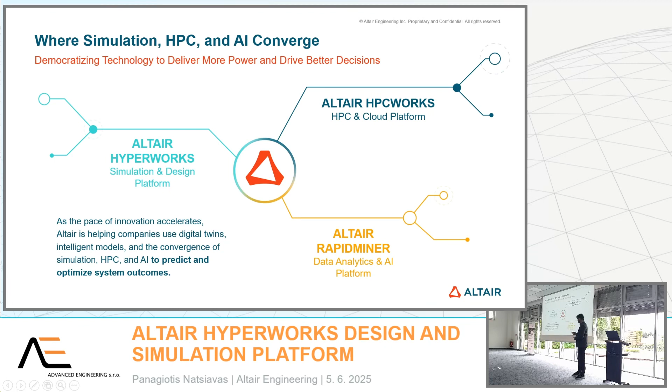So today's focus is going to be the first pillar, as I said. So I'm going to talk about the simulation part. And here I'm listing some of the benefits. Of course, since we're talking about simulation, with Altair HyperWorks, we're trying to reduce design iterations and physical prototypes. That means reducing cost of the company. Also, we're trying to empower large exploration of design solutions by having dedicated ribbons and workflows for optimization and design exploration. Also, we foster innovation with our tools, and most importantly, we help engineers and designers to talk the same language. So we help companies with many team members to overcome the different silos and to have all the people working together and having access to different tools that they can learn pretty easily and solve their challenge.

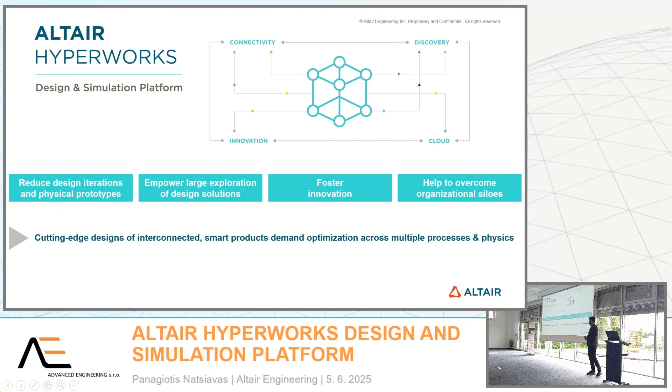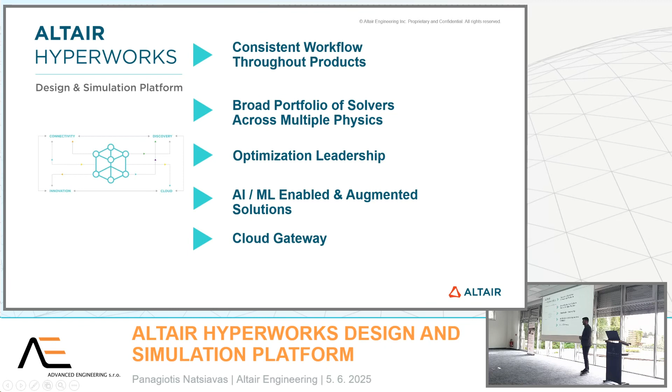So this is the agenda for today. I'm going to talk briefly about our modeling and visualization techniques in the beginning, and the consistent workflows that we have and connect with our broad portfolio of solvers across multi-physics solutions. Also, on top of that, how we leverage optimization to accelerate processes, and how we also, nowadays it's a trend, how we are pushing and enabling solutions and augmented solutions by using AI, artificial intelligence, and machine learning. And lastly, we're going to close with some news about our cloud and our Altair One solution.

So Altair, if you may know, offers a big variety of tools from concept design to validation, exploring multi-physics analysis. So one can use different tools to build her model. So we have Altair SimSolid.

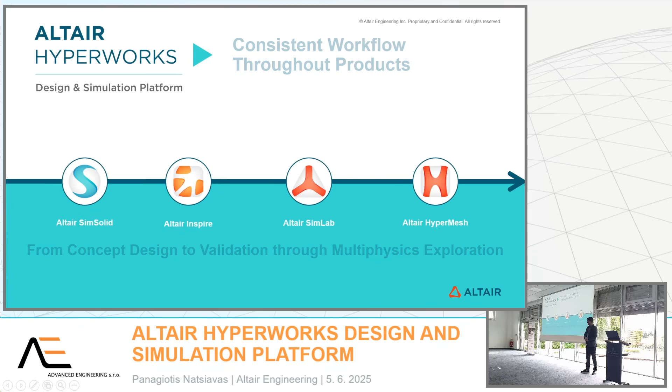So we have Altair SimSolid, our revolutionary meshless solver. We have Altair Inspire, which we call a simulation-driven design platform because the simulation in early stages of design really drives the design of the product. Then we have Altair SimLab, which is used for multi-physics analysis.

And lastly, our flagship product for detailed modeling and validation, Altair HyperMesh. Here I'm going to also spend some time introducing the new GUI, the new product called Altair HyperWorks. So as I said, based on the design time and the profile of the person, we have the right tool for you.

For designers, when you are in the early stages of design, we have Altair SimSolid and Altair Inspire that you can use in the very early stages of design. It specifically targets not so much experts in finite element analysis, but designers who are just starting the first steps with simulation. So it's an easy GUI, easy to learn, easy to use.

Then, for part-time analysts and for people with more knowledge, we have Altair SimLab, and here we also leverage a multi-physics approach, so you can really solve a thermal problem coupled with CFD or with structural analysis. It's very easy to use and easy to couple this analysis. And lastly, for detailed modeling, complex designs, big assemblies, and for finite element experts, we have Altair HyperMesh.

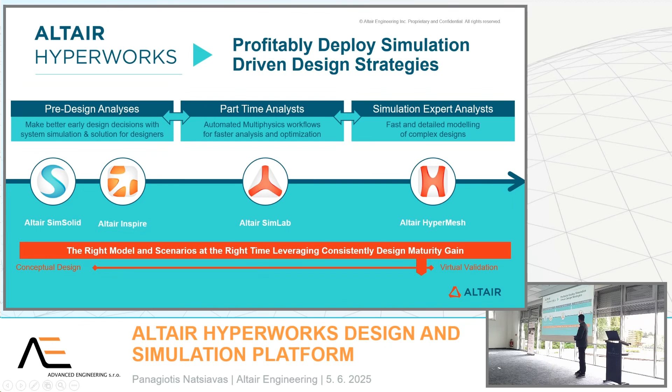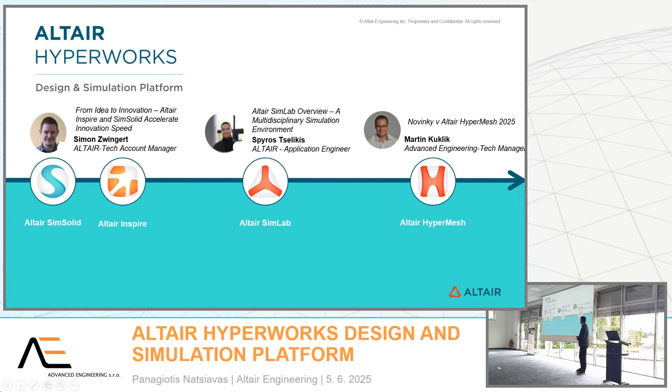And the agenda for today looks, it's built accordingly. So we have different people talking about our different products. We have Simon, who's going to talk about Altair SimSolid and Altair Inspire. Then we have Spyros Tselikis from Altair, from the same office. Spiros will talk about SimLab and some use cases engaging with multi-physics analysis. And also we have Martin, our colleague from Advanced Engineering, who is going to cover the new features in HyperMesh 2025.

So let me also share a few things about our vision for the future and how we're trying to shape our products. Our vision is to have a unified user experience across all different products. So we're trying to blur the lines between the different products, giving the opportunity for someone using Altair SimLab for multi-physics analysis to take it and mesh it maybe in HyperMesh and leverage the extreme capabilities of HyperMesh in meshing.

Or take it and do some rendering analysis in Inspire Studio. So some of our products already look alike, they have the same GUI, let's say. But we're trying more and more for the products to have the same GUI. So our solution is really not to sell our products to you, to our customers, to our users, but really sell our solutions to your challenges.

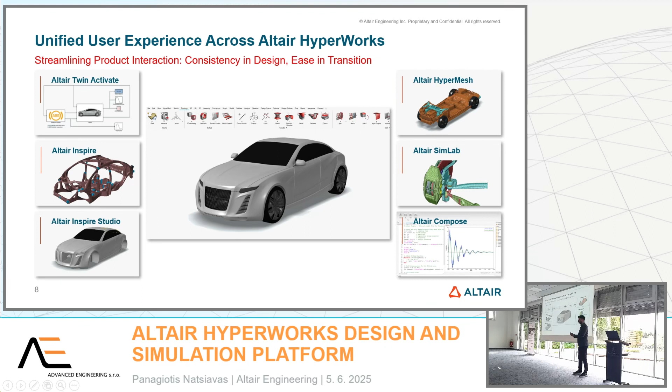So we're not going to name products and stuff, but we're going to name solutions to you, because the only thing you care about is how to solve the everyday problem. So this is the vision and where we're trying to go: one product, easy to use, easy to ramp up.

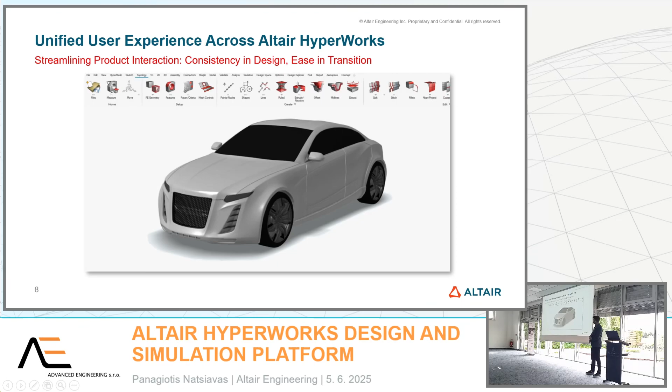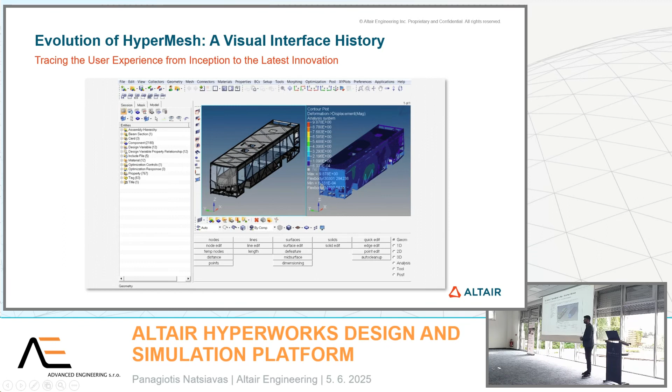So let me focus now on HyperMesh. HyperMesh has been Altair's flagship product for more than 35 years. The development team worked tirelessly all these years to put in nice features and workflows that are well ahead of industry standards. Here you can see different looks of HyperMesh, how it was in the beginning. If you know the early photos, maybe be careful, it's going to show your age.

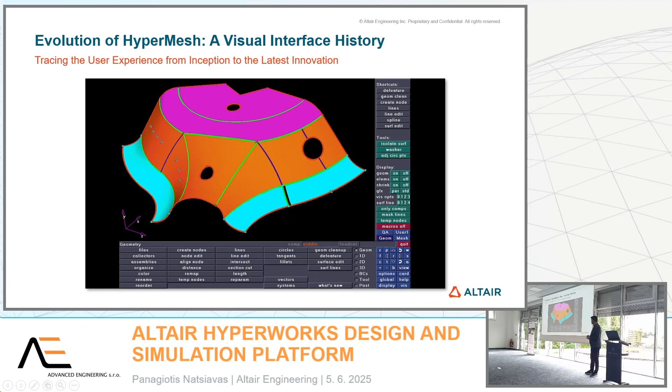So this is how we started and how we ended. So now is the time that we leave this classic, let's say, HyperMesh in the past, and we're moving to the new interface. From 2022, we only have the new HyperMesh, and we believe that with the new HyperMesh, we bring tons of new development and new experiences for our users. Of course, we're trying to make this transition, this migration, as seamless as we can. All the models you had before, all the scripts you may have, the processes, they remain unchanged, and we are here for you to help you.

We have tons of material online, tons of trainings. You can also ask for training on your dedicated specific needs. So you are not alone in this migration process. We are here to help you.

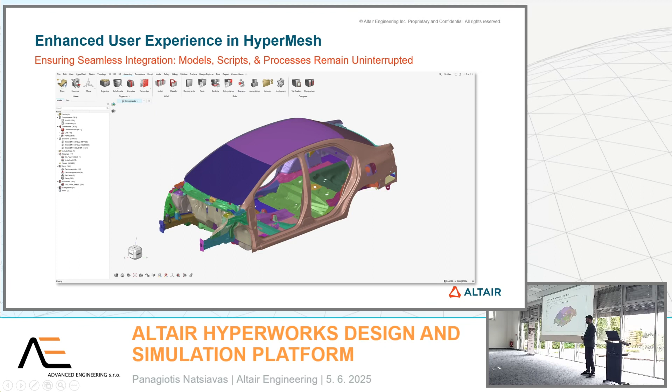So some of the new workflows, we believe that we have streamlined all the new tools with the new interface. The big change from classic HyperMesh is that now all the panels are gone, and now we have ribbons. The ribbons are in the logic of the CAE analysis, how it starts from geometry cleanup, then how you move with the meshing, how you apply the boundary conditions and loads, how you send to the solver, and also we have some post-processing capabilities in it. So it follows the logic of the sequence of the CAE chain.

Of course, we have drop-down menus that you can see.

If you select a tool, we have another menu below. We also have help documents that explain what this functionality is doing, and some shortcuts that you have. Of course, you have better view controls with the cube that lets you rotate your model and have different views. And if you don't know something, you can click Ctrl+F and write it.

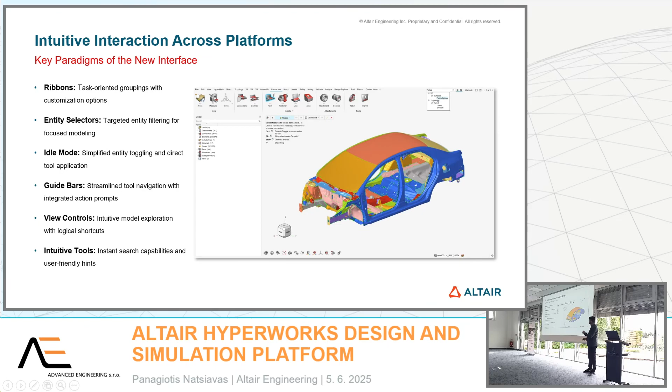So I'm going to use the auto-mesh functionality. You can really find it there and it will populate the corresponding ribbon and tool.

So why are we doing this? Why are we changing from classic to the new GUI? What's the motivation behind this change? As I said, performance and the number of clicks is mission critical for us. It's very important to give you enhanced tools.

But it's not only that. We believe that with the new HyperMesh, we have tons of new enhancements and new workflows. I have a slide that summarizes most of them, and I believe Martin will also share some news. Also, some tools have integrated artificial intelligence in them, so I will explain and show you the shape AI technique that we have, and also the physics AI that is already embedded in HyperMesh, so you can really use it already.

We also made it a seamless learning experience for new and veteran users. It doesn't matter if you are new to HyperMesh or used to the classic one. The trainings we have let you get up to speed with a couple of hours of training for 3-4 days, and then you can be independent. As I said, we're trying to have this unified GUI, to complete a congruent user experience and have the look of all the products be the same.

And also, we're moving towards this because we see that most of our customers are dealing with multi-physics analysis. We are moving on this road towards cloud, towards collaborative work and multidisciplinary solutions.

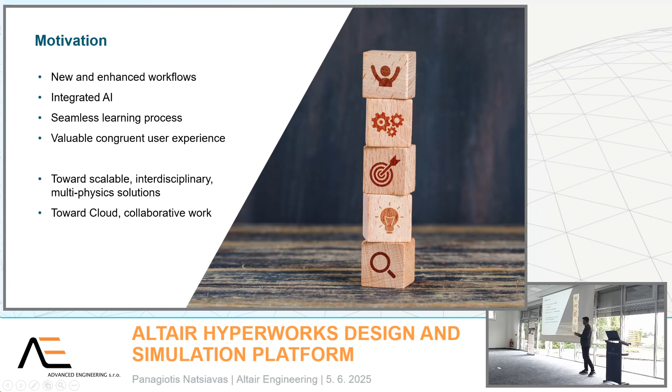So for all clients, we have the view cube I mentioned, which makes it very easy to handle the model, and the tool belt. We also have the dark theme. This is a very wanted feature. Now you can use HyperMesh and have a dark theme in the background.

For HyperMesh, I'm not going to go through all of them, just to name a few. We have a new workflow design explorer since a couple of years now. It's not pretty new, it's from 2021 I think. For design exploration, I have some slides later on that I'm going to show you.

We're also trying to connect the post-processing world with the pre-processing, so we brought HM Post into HyperMesh, so you can really see some results while you are pre-processing by leveraging the HM Post ribbon. And for HyperView, we have an upfront loader, so you can load the results upfront in order not to wait ages to load the model.

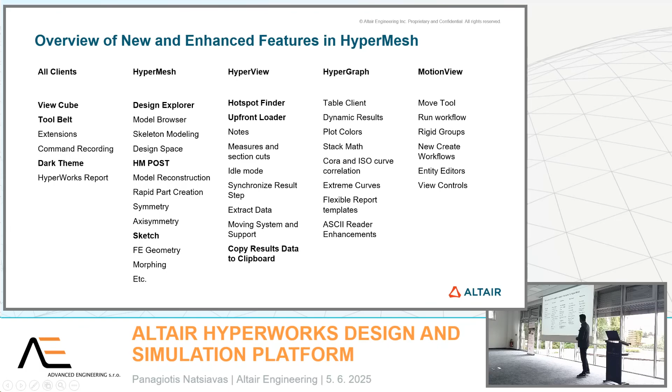The hotspot finder is a pretty nice feature that lets you spot all the red areas pretty quickly. There are also some new features for HyperGraph and MotionView, which I'm not going to go through all of.

Now moving on to our solvers: all the previous tools I mentioned, SimSolid, Inspire, SimLab, HyperMesh, are seamlessly linked with all these solvers. And as you see, we cover and simulate different areas.

We have solutions in control systems, and we offer solutions in the manufacturing world with Inspire Cast, Inspire Mold, Inspire Extrude, and all these Inspire platform solutions. We also have solutions in the world of vibrations, acoustics, explicit analysis with RADIOSS or with OptiStruct, which I'm going to show, for crash analysis, blast, heat transfer phenomena, CFD, fluid dynamics, and also some electromagnetics applications and electronics. So you see a variety of different solvers here that are seamlessly linked with our modeling and visualization tools.

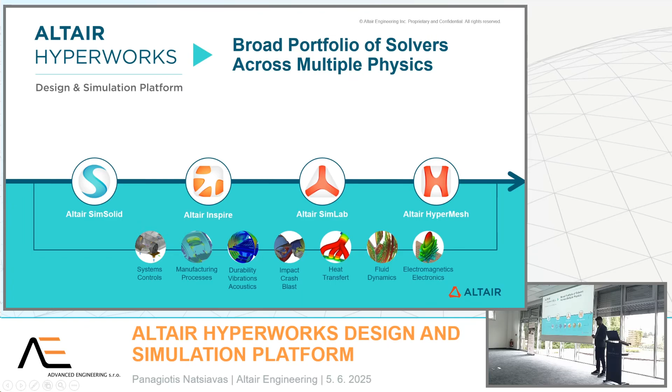Given my background—since I'm a mechanical engineer, I forgot to mention that in the beginning—and I'm more focused on structural analysis, here I have focused a little bit on our structural solvers: Altair SimSolid, OptiStruct, and RADIOSS. So I'm going to show some features and a brief overview of each of these tools.

So I'm going to begin with what we believe is going to be a breakthrough: a revolutionary SimSolid, which doesn't have mesh. You don't need to—you just import CAD, no geometry simplifications, you don't need to spend hours on meshing. It uses pretty much the same theory as the other solvers: it's an external approximations finite element method.

And you can have results really quickly, no matter how complex your design is, results in minutes. So I recommend, if you haven't tested it, it's really an eye-opener. Of course it gives you accurate results, but the nice thing about SimSolid is you can learn it in a couple of hours. It's a very easy GUI, easy to use, easy to learn.

The development team has worked tirelessly. Since we acquired this tool in 2018, we have 20 plus major releases, so we're moving fast and putting many functionalities into it. We have two flavors of SimSolid.

We have the SimSolid app, standalone, that you can download and use, and we also have SimSolid on the cloud, a web browser application. And just to name the last development we did, we integrated an eCAD, electronic CAD reader, in SimSolid. This opens the road for not only structural analysis, but also some electromagnetic and electronics simulation.

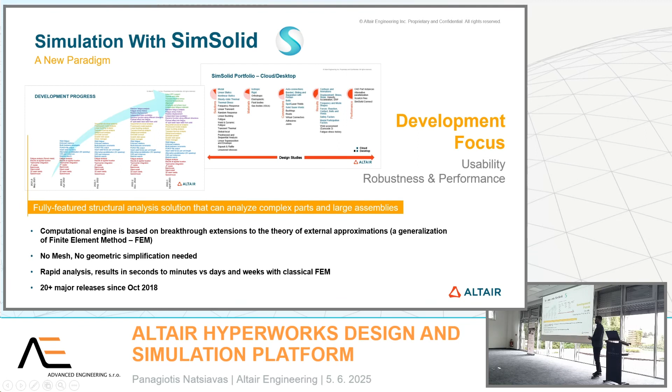Moving on to the second structural solver, Altair OptiStruct. OptiStruct is our industry-proven software solver for linear and nonlinear analysis under static and dynamic loading.

If you compare it with open source Nastran, the linear solution is pretty much similar, it's an enhanced version of linear analysis in Nastran. But since 1992 when we started with OptiStruct, the development team transformed it into a fully featured solver. Now we can solve nonlinear phenomena, heat transfer, fatigue, vibrations, and lately we also integrated some explicit code, so we can solve phenomena using explicit timescale, like impact and drop tests.

The benefit of OptiStruct is that you can have one model and one solver for different analyses. You can solve the same part from the perspective of fatigue, heat transfer analysis, or nonlinear phenomena, so you can have different simulations.

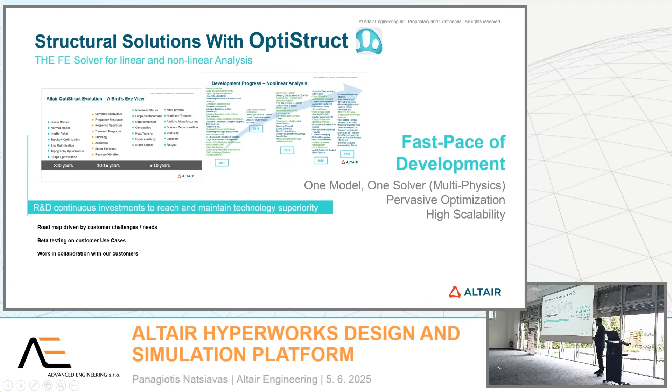It also has embedded optimization, so you don't need to open another tool or product, you can leverage optimization within OptiStruct. And some parts of the code are parallelized, so it's highly scalable and you can run it on multiple cores. But let me focus on the latest development, the explicit analysis.

It's been 2 years now that we've developed a new explicit solution in OptiStruct. It's not the same as Radioss, it's a totally new workflow that has all the standard analysis capabilities.

And most importantly, we recently introduced a single input file with implicit and explicit subcases in it. So you can start with implicit analysis, and when the time step becomes really small, you can switch to explicit analysis. This implicit-explicit continuation subcase is all in one input file, and again, part of the code is parallelized so you can gain speed.

And here on the right, you can see different applications like a drop test that we solved with OptiStruct, or an impact calculation.

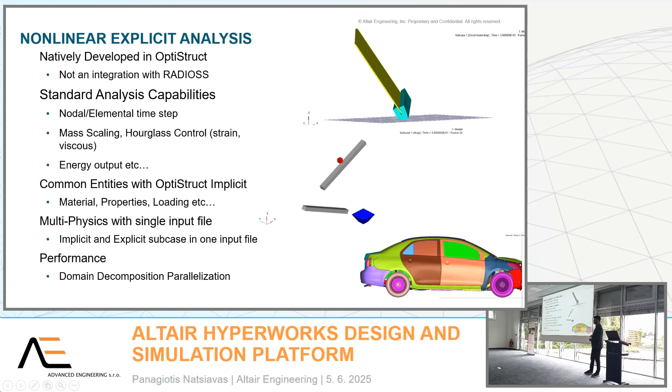Regarding Radioss, you may have heard that we also introduced an open source version called Open Radioss. It's now been 3 years that we've opened it up for the whole community. Here are the reasons why we did it: to democratize the use of explicit dynamics analysis, to maximize synergies between different institutions, universities and industry, and to facilitate knowledge exchange and ideas.

Everyone can go and download Radioss, Open Radioss, it's free. We only have one restriction, though it's not really a restriction: when someone develops the code further, they have to put that development back for the favor of the whole community. So if you make something new, we encourage users to contribute it back, which really helps move forward the explicit analysis solution.

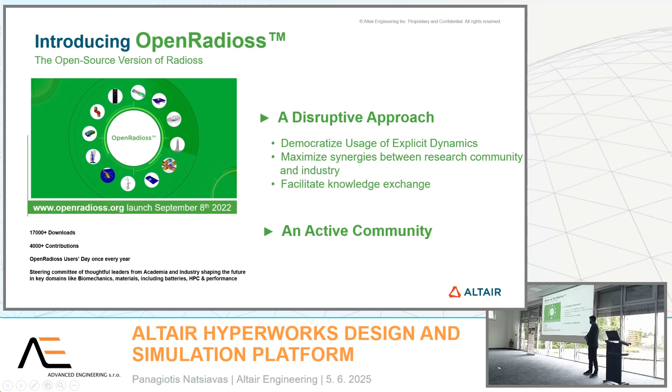Besides the open part, which I call Open Radioss, we also keep Altair Radioss, a commercial version that comes with the Altair license model. You get the same technical support, can ask questions, and it has extensive QA. It's available under Altair units, and it has some additional capabilities like encrypted models for dummies and barriers, and some other material laws and such.

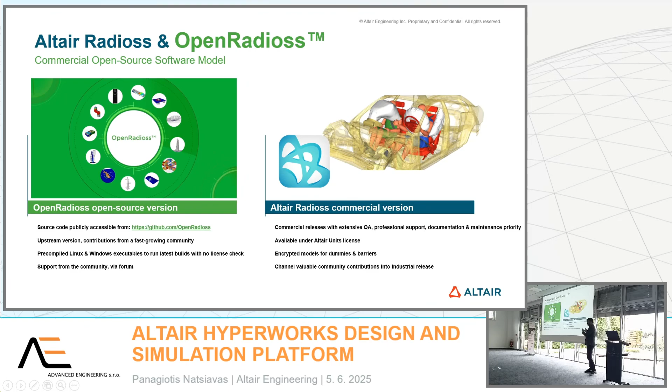So we have Open Radioss, which everyone can download, it's open source. And we also have Altair Radioss, under Altair license. Now that I've given you these three solutions, let me put some perspective on when to choose which tool based on the engineering challenge and the physics you're trying to solve.

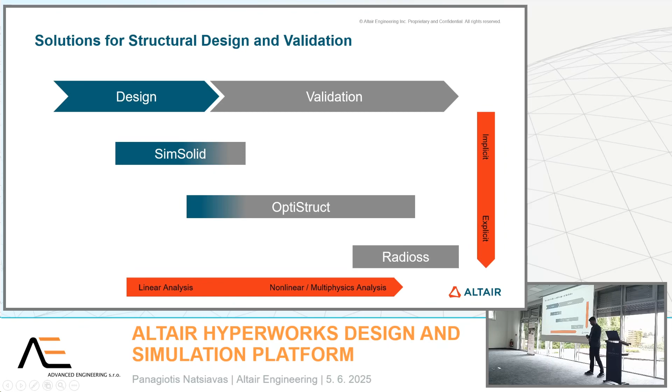Let me move now to optimization. Regarding optimization, really we can brag that we are the experts here. We have had optimization techniques since 1990, so we have been introducing topology optimization for 35 years now. And this optimization does not only affect structural analysis, but also applies to all these different solutions, so I've chosen some use cases not only on structural, but on CFD and thermal analysis that you can see.

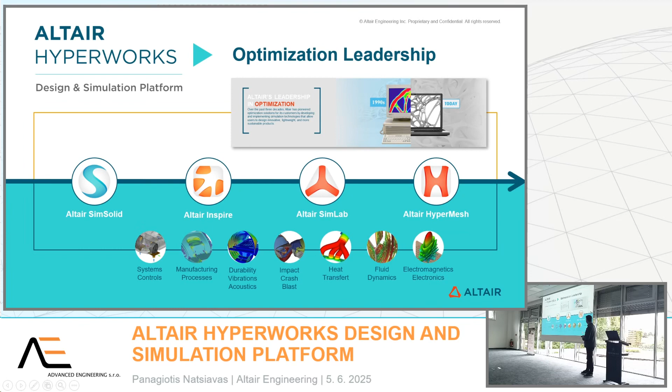So our techniques are apparent within these two products, OptiStruct and HyperStudy. I've already talked about OptiStruct, which has optimization embedded in it, but we also have another tool called HyperStudy, which I'm going to talk about in a minute. OptiStruct has had optimization techniques for 30, 35 years now.

We have two main pillars of optimization, let's say: the conceptual optimization. This really starts in the early stages of design, when you have some ideas on how the part will look like, and here we have two different optimization techniques. Topology is about where to place the material, and you can get rid of areas where you don't need material - this is called topology optimization. And then we also have topography optimization.

This finds the best pattern. For example, if you have beads, especially in the doors of a car or on the hood, this is just to have the best beads pattern in order to reduce maybe the noise - you don't want to hear the engine.

So this is called topography optimization. And then, as you go further into the design, for better fine-tuning let's say, we have parametric and shape optimization. This is the second pillar, and here we have shape optimization. We can change a little bit the shape and also the size, for example the thickness of each component. So different optimization techniques based on different applications that you are trying to solve.

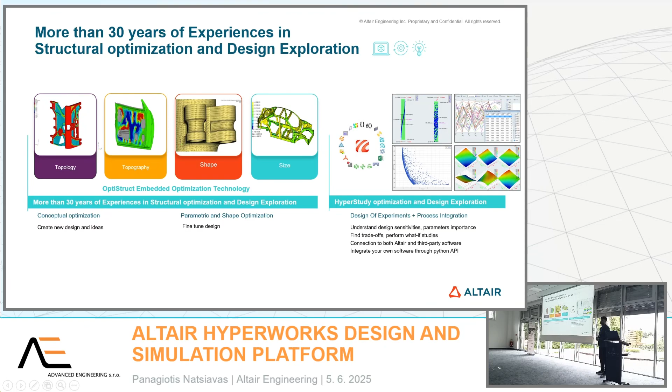And also the nice thing about HyperStudy is that it doesn't work only with Altair solver results. So of course you can load results from Radioss, from OptiStruct and SimSolid, but you can also load results from third-party software - so you can load results from different solvers like Abaqus, ANSYS, and so on. Or you can even have your own code with Python - we have a very nice Python API that you can leverage to build your own optimization workflow.

Being on the topic of optimization and design exploration, let me move a little bit and say things about our Design Explorer workflow. Design Explorer is a ribbon-dedicated workflow in Inspire - we had it in Inspire, now we have it also in HyperMesh. What it really is, is an end-to-end workflow for quick optimization and results processing, with an easy GUI.

You can identify your design variables, you can have an exploration summary to see the different designs, and you can understand the effect of these designs on the part. And what's the nicest - the one that I find a highlight of this - is the nice trade-offs that we have.

These nice sliders that you can change on the fly - for example, if you define the thickness of the part as a design variable, you can make the part thicker or thinner, you can move it left and right, and the part on the fly approximates, using AI and machine learning algorithms, the new stress or the new strain. So this is a very powerful technique that we have, the sliders.

And lastly, it's also really good in terms of how you interpret the results. It does result categorization, and you can have some scatter plots and stuff like that.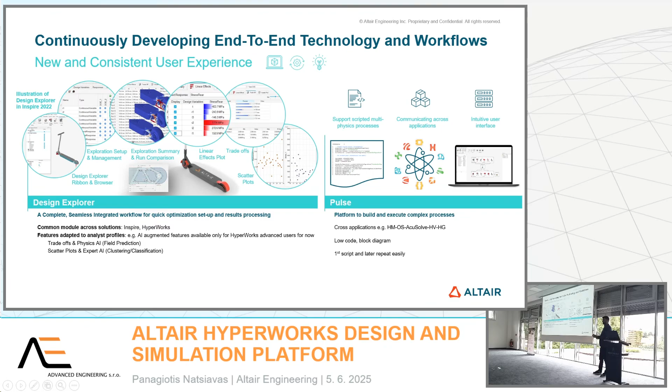So Pulse is really connecting the different products together, and it has this nice workflow from pre-processing, solving, analysis, and post-processing of the results.

Now some optimization use cases that I have, here I try to have different examples. So here I used for thermal and fluids, on the left, firstly, OptiStruct with AcuSolve, again an FSI topology optimization technique. It's about heating pipes and finding the best geometry of the pipes in order to have the least amount of thermal expansion. So this is an analysis that uses topology optimization for CFD and structural analysis.

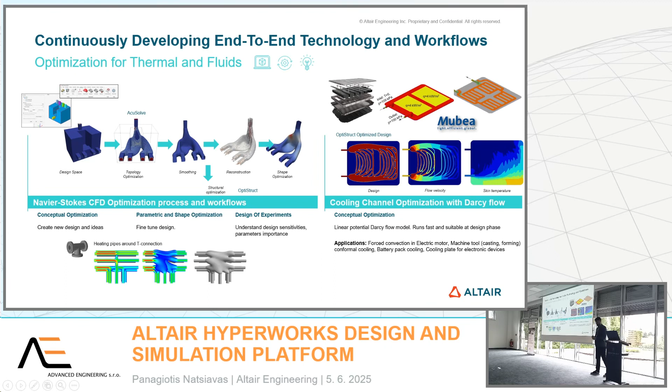Another application is a project we're doing with Mubea. Everyone is going to benefit from that - batteries, laptops, everything has a battery, and how we cool it off so that when we use it we don't get a very high temperature. We're putting a cooling plate and leveraging optimization with Darcy flow in order to have a better flow of temperature and not heat up the device. So this is, again, a use case we're doing for heat transfer analysis with structural optimization.

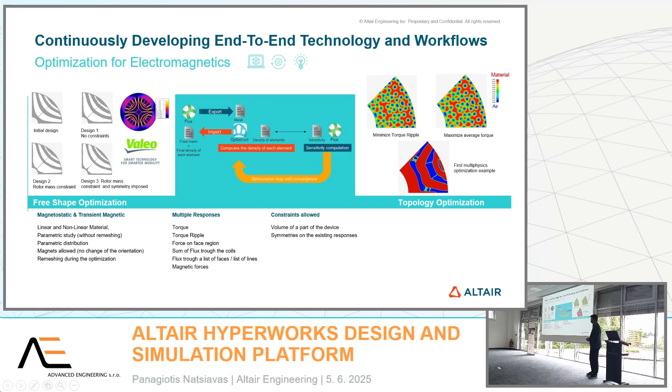And lastly, another use case this time is in electromagnetics, e-motor. We have an electric motor, and we're trying to find the optimum shape. Here we're performing a free shape optimization using our Altair Flux, our product for doing low frequency electromagnetics, and how it connects with OptiStruct. We're trying to maximize the average torque of the machine and also minimize the ripple of the torque. So we're trying to find the best shape of the rotor magnets to do that, and this is a project we're working on with Valeo, another OEM for automotive.

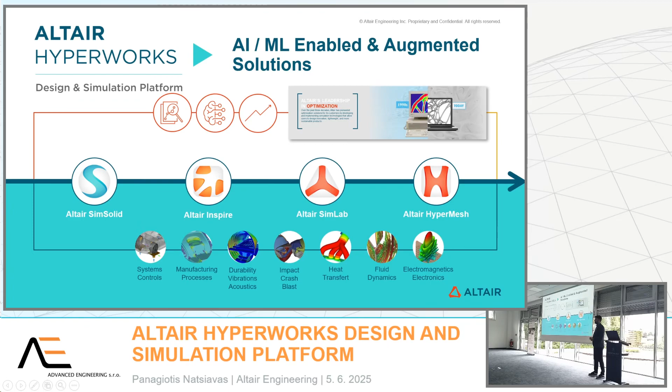Now, also, on top of optimization, I have to say we're also trying to leverage artificial intelligence and machine learning when it's of better use. So some of our workflows have AI integrated in them.

So why should we use AI? What's the added value with Altair AI? First of all, what we're doing with Altair AI is trying to augment the already variety of tools that you have, augmenting the toolkit of the engineer.

We're trying to increase productivity by getting rid of repetitive processes, when you're doing the same thing again and again. We leave that for the AI, and try to focus the human more on the productive process. We're also trying to capture more knowledge and have more leverage on the results we're trying to find, so we have more documents and results that make sense to you, and you're able to take a decision much faster with better insight.

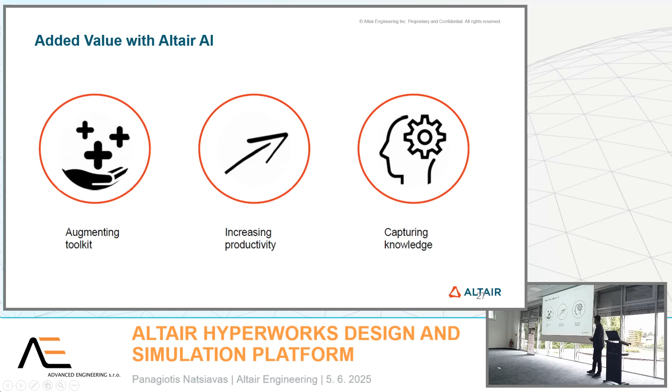So let me summarize all of the AI tools that we have, and there are many of them. I've already talked about HyperStudy. HyperStudy is really not, I would say, AI, but it's the pre-processing tool for AI, as it helps structure results better and find outliers that wouldn't be helpful later in the process. My colleague Spyros has a nice workflow about HyperStudy's connection with Physics AI, and he's going to explain how you can use HyperStudy to perform some Physics AI predictions.

Then we have Physics AI Studio. This goes with Physics AI, so you can really leverage it, but this is on Altair One, leveraging the cloud, so keep an eye on this. Again, the Design Explorer that I talked about, which is a dedicated workflow for design exploration in HyperMesh and Inspire.

We have a third pillar - this is a whole new solution we have here, low, no-code data science capabilities. I'm not a data scientist, so I don't have more than that to share, but we can connect you with an expert to explore more on this.

The last three I have slides for: Shape AI for geometry recognition. Shape AI is a technique integrated in HyperMesh. What it does is group together similar shaped parts, which helps you later if you want to make a change in one of them, to propagate this change very fast to the rest of the group.

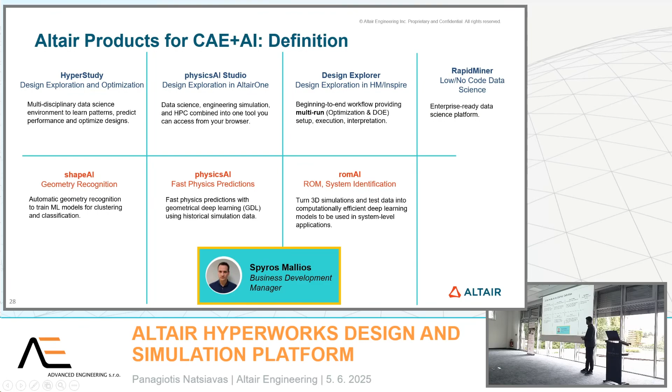About Physics AI and ROM AI, my colleague Spyros Mallios is going to talk about this, and he has two different slots - firstly for Physics AI, and then for ROM AI, and how it connects with the digital twin technology that we have. This is a pretty interesting topic. So I'm going to show the rest of the things that we have.

Here is a glimpse of how the products and features look like. If you notice, except from RapidMiner, which is a different platform, here we have AI Studio, Panopticon, different tools. HyperStudy is a standalone tool that I mentioned. Design Explorer, Shape AI, Physics AI - all these are integrated in HyperMesh.

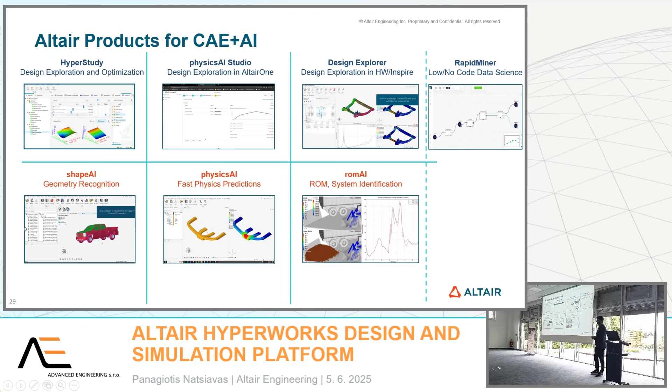So you can use it if you have enough Altair units, at no additional cost, and you don't have to download another app, so you can start using it right away. ROM AI, I think you can invoke by using Twin Activate, another product that we have. But all these are tools you can use, depending on the amount of Altair units required. So this is a glimpse of how each of these tools looks.

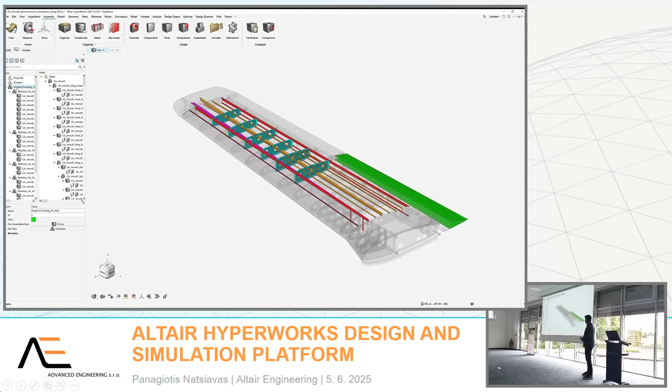Let me go a little deeper and explain Shape AI. As I said, we have a dedicated ribbon under the assembly, the Match tool. Here you just click the parts that you want to find similar ones for. Here we select the whole plane, and you see how fast it opens the subsystem assemblies and groups the parts together. For example, here it grouped different parts together, which you can see on the left.

Let me isolate some ribs, and let's say I want to delete some elements on this part, and I'm going to make a change. You can go and sync later on, and you'll see that this change is propagated to all the other ribs. Here you have like 2 ribs, but you could have 1,000 bolts or rivets, so when you make one change, you can quickly propagate it to the other parts.

It's really good because it works not only on finite element entities, but also for CAD. So you can patch a hole here as well. Here I deleted some elements, but you can also perform CAD manipulation.

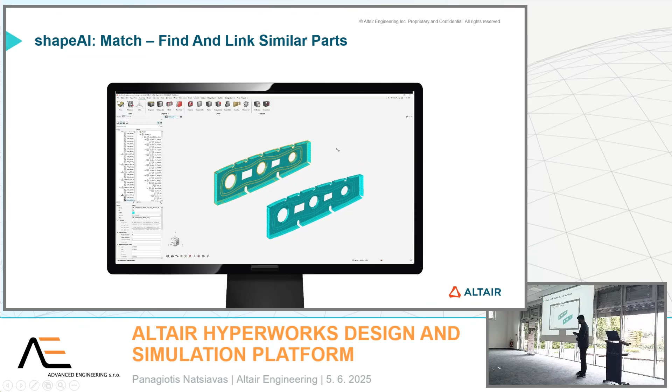Going one step further, using the technology of Shape AI, we have a new workflow called Classify. This is how you group certain similar shaped parts together, but then you also go one step further and label them. For example, here I have a use case with cars, but it works with any other assemblies that are similar, like airplanes.

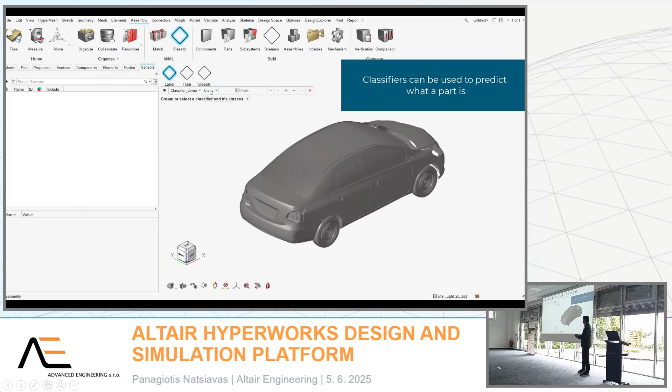Firstly, you need to train the model. You need to put in some parts that are similar, so you start by labeling the parts. Here I put a car, and I start with panels - the green are panels. Then I go and label some windows, some tires, so HyperWorks knows what each part looks like.

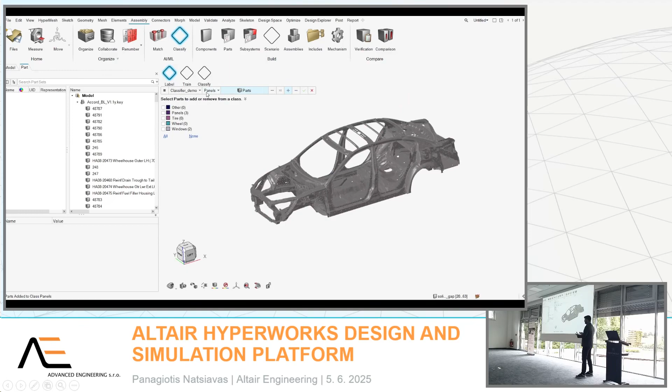Then I load another car, pretty different, just to build up the amount needed for the training. Then I hit train, the second button here. Then I bring a new model that HyperWorks doesn't know, and I say classify. Now the software, because of the previous cars I've put in, knows which parts of this car are the panels, which are the tires, which are the wheels, and so on.

Of course, how easy it is to train the model depends on how similar the parts are that you're training the software with. So be sure you have all the different types of cars in order for the software to recognize the different parts when you put something new. But it's again a workflow leveraging AI, and I want to highlight - this is integrated in HyperWorks, so you can start using it right away. It's under the same ribbon as Match, Shape AI, so it's under the assembly ribbon.

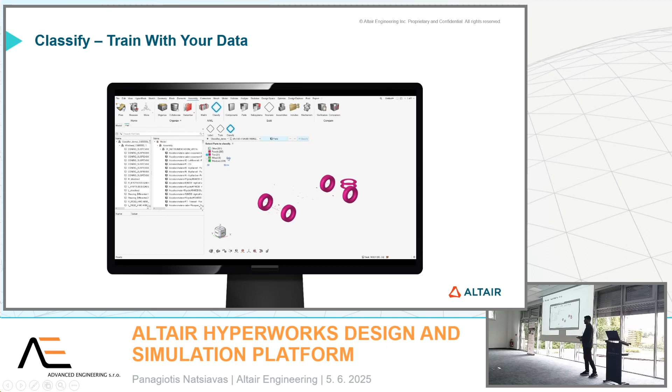And a few words about the rest of AI solutions that we have. Physics AI, again, I'm just touching this, my colleagues will go deeper. Physics AI is a machine learning app that's using geometric deep learning and graph neural network techniques and learns from historical simulation data, and is able to predict the behavior of the part if you change something.

It works on both meshes and CAD, so you can also apply it to CAD. You can just import geometry and hit predict. It leverages also some CPUs and GPUs, and we have it in HyperWorks since 2022.3. So this means a couple of years now.

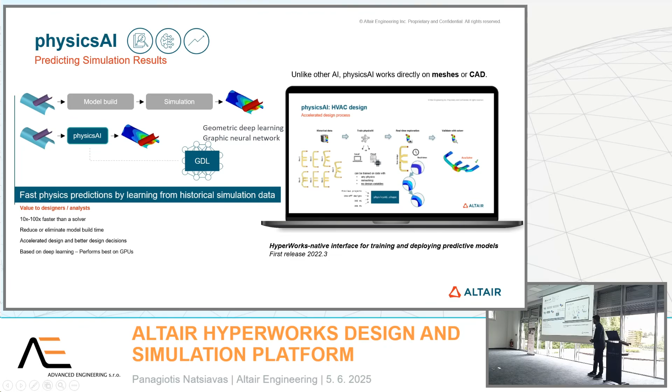Another AI application that we have, and it's pretty interesting, it's ROM AI. Again, this application is a no-code application using artificial intelligence. And what it does, it translates the full model, the full analysis, the full high-fidelity analysis into a reduced order model that captures the accuracy, but also solves it in less time. So it's a no-code application. You don't have to be a data scientist or a programmer to use it. It's an easy GUI. I think the training lasts a couple of hours, 3 hours, and you can be independent.

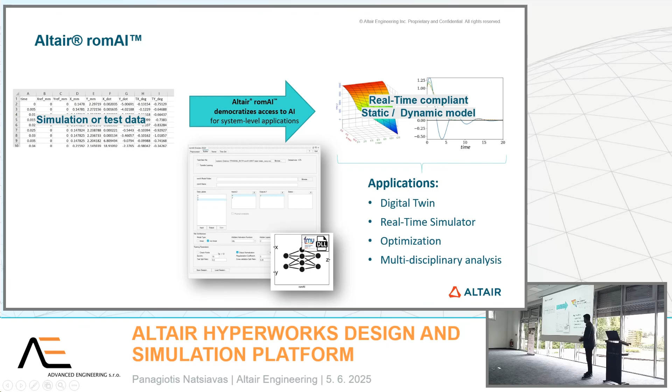And also you can couple it with all these different applications that my colleague Spiros is going to talk about. So ROM AI has two flavors. Either you can use it from high fidelity models to have the reduced order model, or you can also use it when you have experimental data, when you have Excel files, when you have different data, from test data, to identify some parameters that are important. So another flavor that it has is system identification.

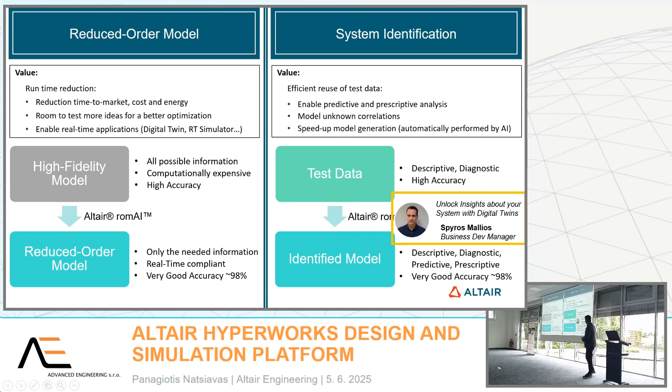And again, in both cases, it has very good accuracy, up to 98%. But the real benefit is reducing drastically the simulation time. And you will see some numbers that my colleague Spyros has, and how it couples with the digital twin transformation. So again, another interesting topic on that.

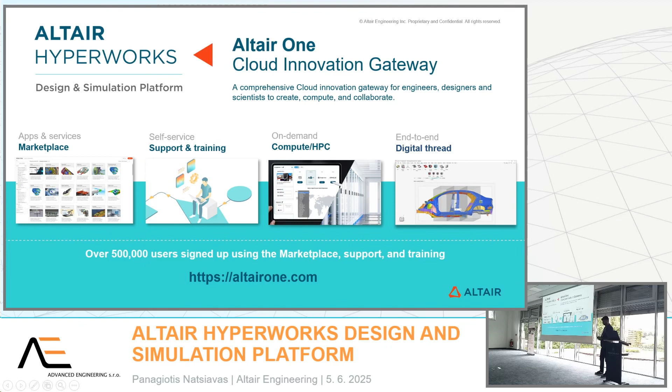And I'm going to close my presentation by giving some news. I think Hynek touched the point from the little Czech that I understood, but let me also share some very interesting, exciting news actually. I'm sure you all know that Altair is being merged into the Siemens family. This acquisition happened blazing fast compared to our competitors, we closed it early, end of March, I think, so in less than half a year.

So right now, we're in the phase of trying to integrate. Of course, we're big teams, big families, so it's going to take some time. Maybe we don't have all the answers right now, but what I can assure you is that with Siemens, with also their products and Altair, we're going to deliver to you a full suite of physics-based simulation portfolio. Siemens is strong in some areas, like computational fluid dynamics, maybe on some electronics. With Teamcenter, they have a very good integration with PLM, product lifecycle. And then we are stronger in some other areas, like optimization that I mentioned. We have 35 years of experience with structural solutions, with electromagnetics, and so on.

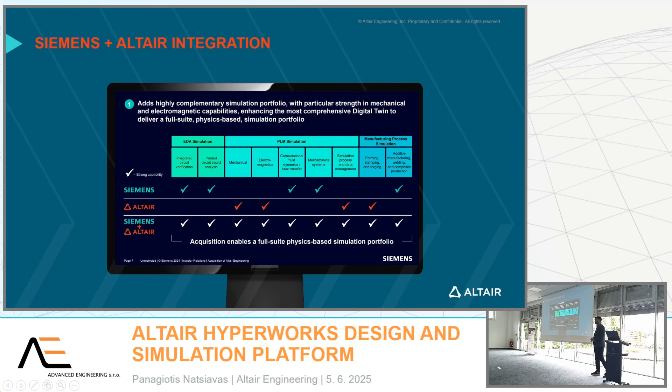So together, we are one big family, and what we can assure you is the value that you're going to get, the support - this will remain unchanged, and this will become even greater now with these two companies coming together. So if you have any questions about this, let me know. We're trying to be as transparent as we can right now. Maybe we don't have the answers, but we may be able to guide you and answer some of your questions. So really big news here. I'm also excited and very happy to be joining Siemens. So with this, I'm going to conclude my presentation, and I want to thank you all for listening and for your attention.